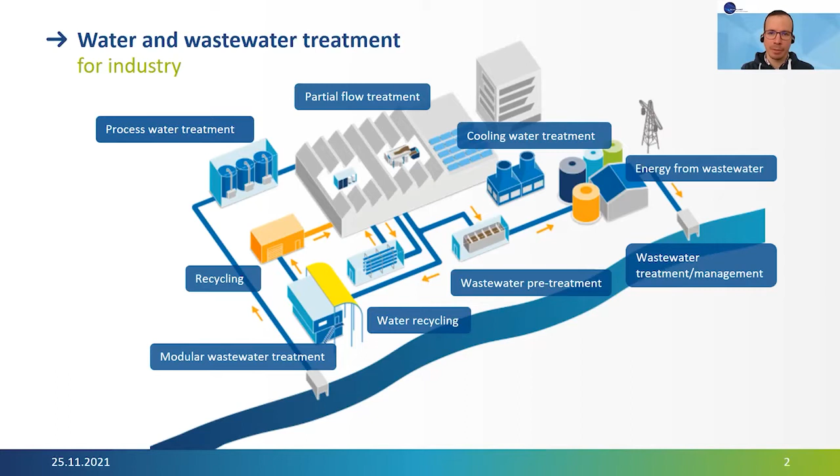Our services - we start with consulting, do the planning for our clients, design and installation. We do as well the plant operation and maintenance. We produce our own water chemicals. We have the full range of services required to operate the plants. We have now as well digital services for plant automation, plant control, industry 4.0, let's say, and we do a lot of plant optimization in ongoing process.

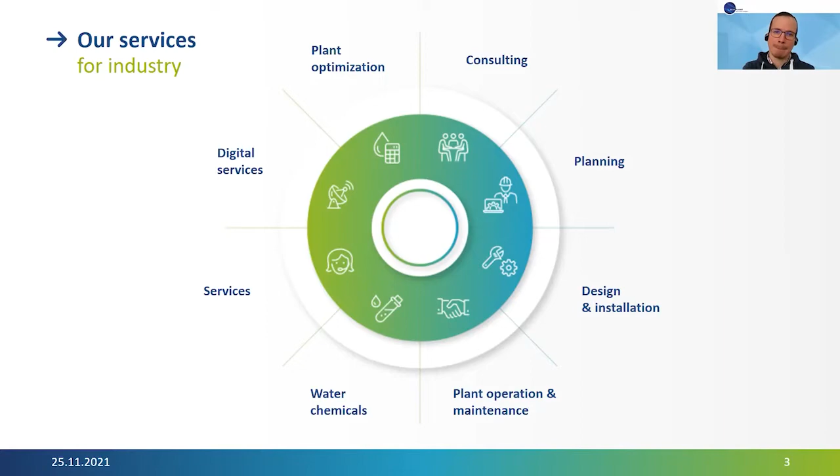The company has now more than 45 years of experience in the market. We now have a turnover of more than 200 million euros a year, 900 engineers in our company, more than 30,000 active service customers, and a localized structure close to our customers.

These are our locations within Germany. Our main places are Rossdorf, near Frankfurt Airport here, and near the city of Darmstadt. But we have a lot of subsidiaries here in Germany to do mainly services all over the country.

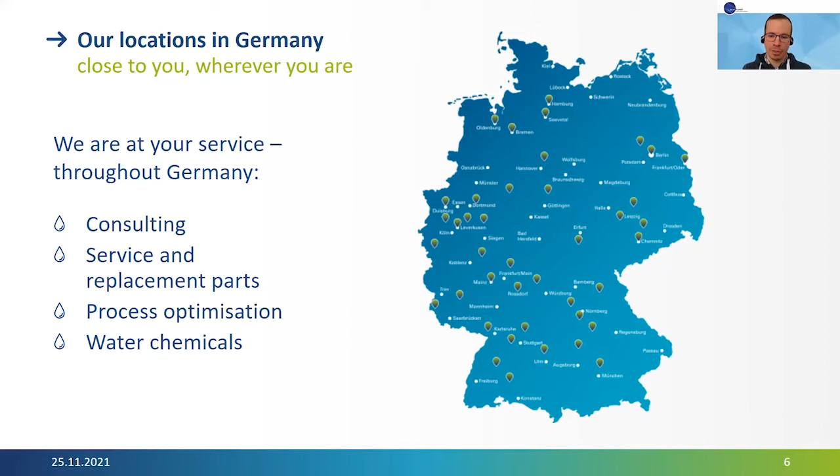Our industry experts examine process in a holistic way. So we do a lot of different projects. We have a lot of knowledge in different industries. We are not limited to these industries, but let's say these are the main industries for us - food and beverage, the chemical industry, steel, metal, surface technologies, life science, pharmaceutical. Mining is very strong, for example, in Russia. And others.

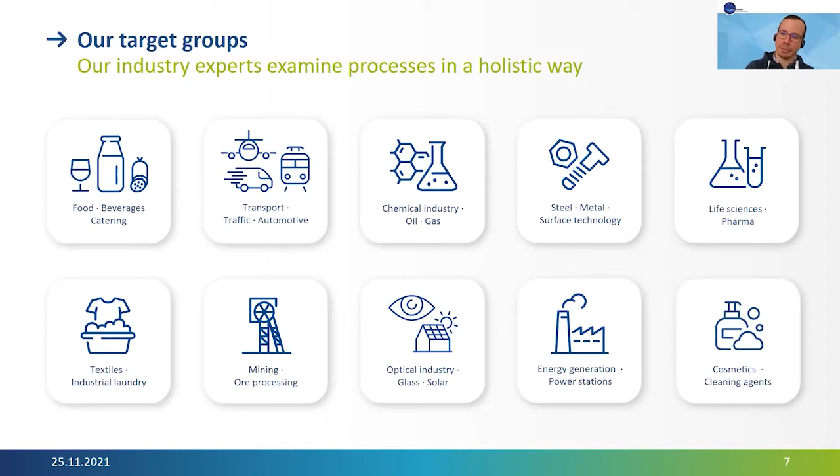The Enviro Water Group is getting bigger, it's growing, let's say, where Envirochemie is the head of the organization, mainly focused on industrial wastewater treatment and water recycling. We do everything that is individual plants and individual processes. And our subsidiaries and daughter companies are then more specialized. For example, the EnviroFalk company, which is specialized in more standardized plants in ultra pure water, for example, and water for pharmaceutical industry.

Innovatec, for example, is a company specialized in water chemistry, especially for cooling water systems. And Up2E is a company specialized in advanced oxidation processes for special applications, so really highly polluted wastewaters to purify.

As already told you, we do the consulting and planning. This is where we most likely start with. The individual problem from the client, we do then the consulting. We help him with lab and pilot test if it's necessary. If there has to be developed something new, we do start with lab and pilot tests, and we do studies and concepts. And then later on the planning and approval for planning.

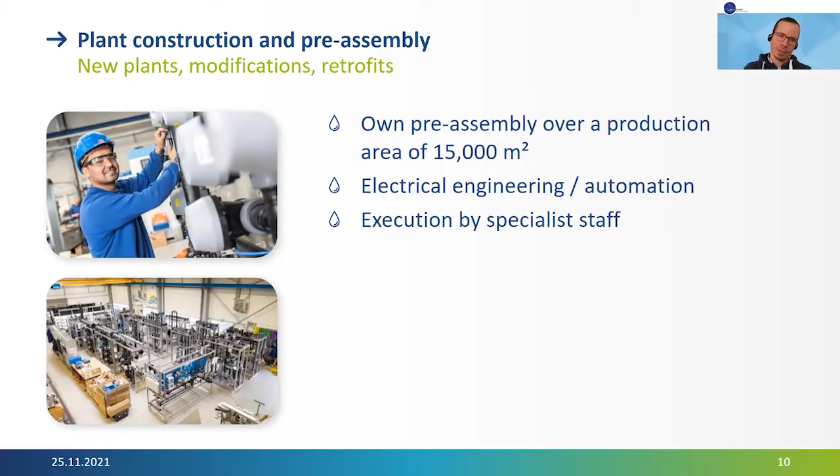Some words to the different technologies, just examples. The membrane processes, called in our house the Envopur processes, which is obviously microfiltration, ultrafiltration, nanofiltration, and reverse osmosis. And the biological and wastewater treatment, for example, aerobic and anaerobic treatments we do have there. All the different types of technologies you might already know - membrane bioreactors, nitrification, denitrification, anaerobic activated sludge processes, and so on.

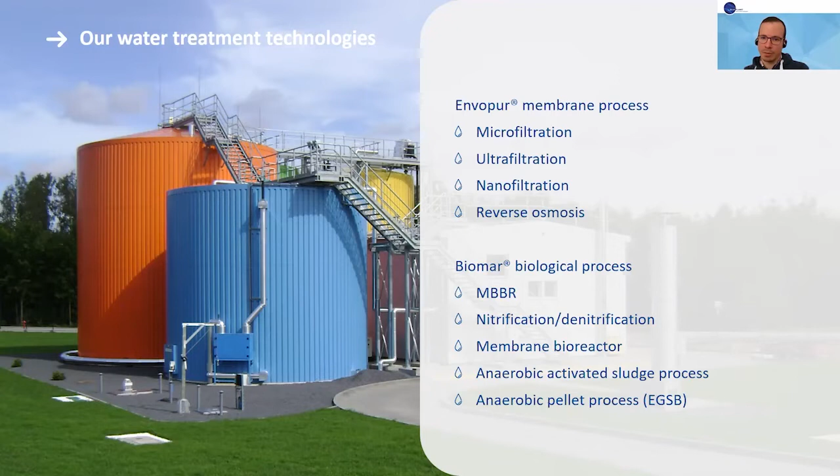We have the physicochemical processes as well, the very classical precipitation, flocculation, sedimentation, neutralization, filtration, of course ion exchange, and advanced oxidation processes. And we're very specialized as well in the dissolved air flotation systems, which are called FLOMAR.

Important for us is our pre-assembled processes. We do not pre-assemble all the equipment we supply, but here again you can see one of our biggest pre-assembled plants. This was a pre-assembled modular system with mainly flotation process and precipitation flocculation for a mining client in Russia. We pre-assemble the modules in Germany within our plant, then bring the parts to the client, do the final assembly, which is really just putting together the Lego parts, let's say, and then directly can start to operate the plants.

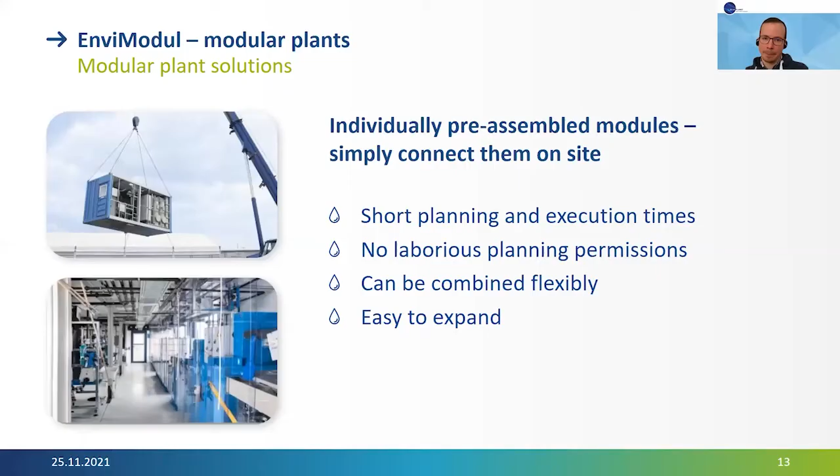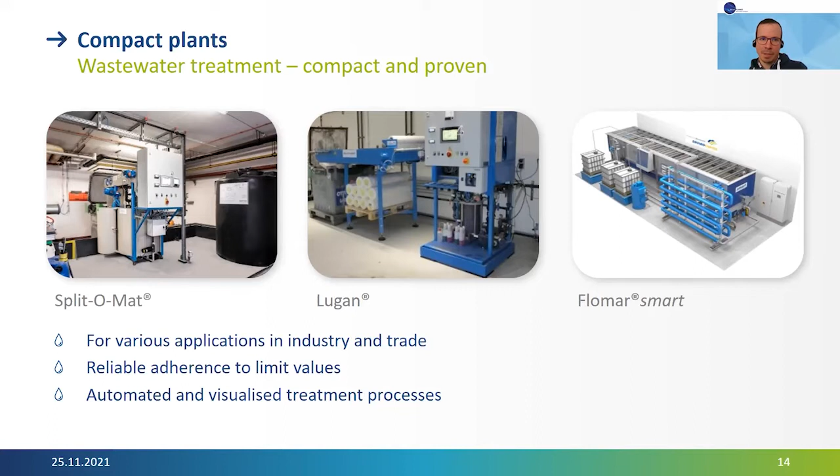We have not only big projects, big plants for high volumes to treat. We also have very compact small plants for applications with lower volumes to treat. This is where we originally came from 45 years ago, but it's still very important in the market, and there is still a lot of applications for small amounts of wastewater to treat. You can see here physicochemical processes, flotation processes, batch processes, but we're not limited to them. This is the main part of the compact plants.

We developed specialty wastewater treatment and water treatment chemical products for our clients' applications. This is very important because it's always a part in water treatment that plays an important role, and we have a lot of knowledge and our own production site, our own laboratory, where we develop the perfect chemical for the individual task.

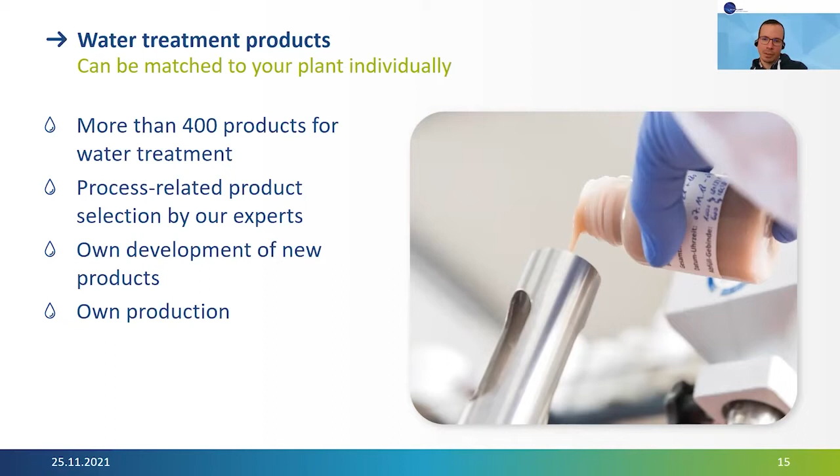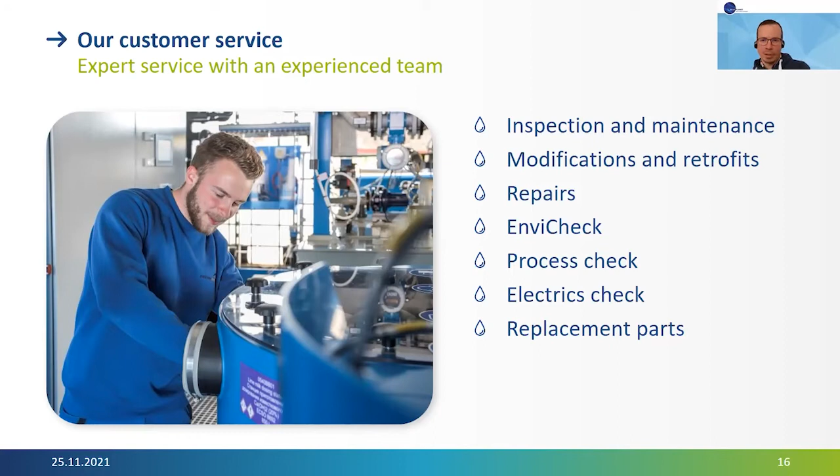Our customer service is key for us, to help the client always, to be with him, not only planning and doing the installation for the plant. We can help for the whole life cycle of the client's plants to keep operating the plant always.

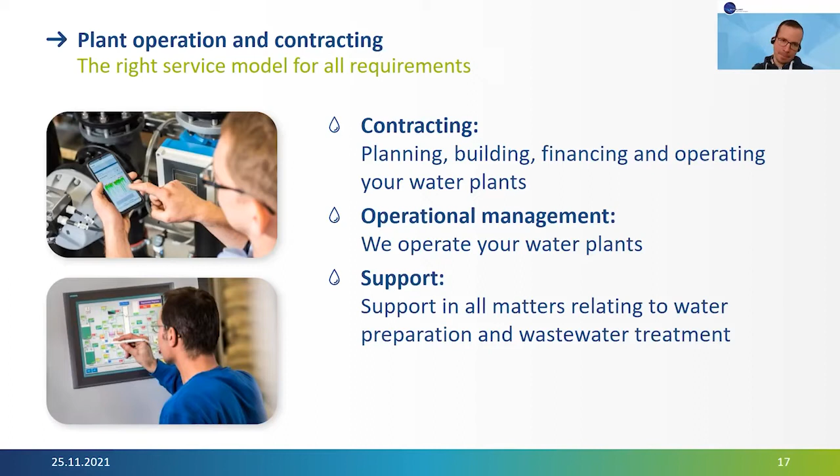Digital water management is getting more and more important as well. I'm not going too deep into detail, I mean most of you can maybe imagine what it is. You can connect from everywhere you are directly to your plant. You can see all the values, all the curves. You can really be connected always to your treatment system, be up to date, and can operate from wherever you want to. Therefore, you have very good process control always.

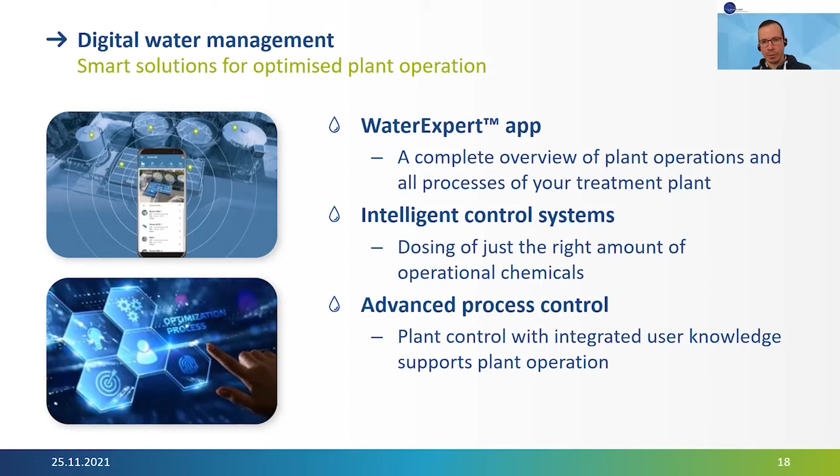And that's all for now with a very brief, short presentation. Thank you for your attention.

Thank you very much, Tibor. However, it was more or less a presentation of your company's activities, but what we are looking for is solutions. Can you please give us some examples about solutions which you have installed for industrial water reuse? And maybe some examples of established technologies and emerging technologies in the field of industrial water reuse.

Just give me a moment to come back into the window to share. I think I'm still sharing... sorry for that. Okay, nevertheless, I'm still sharing I think, I'm not sharing anymore my screen. Is this correct? I'm not sure if I'm still sharing my screen or not. Mr. Meyer, you can answer this question. I'm not able to do so. Yeah, you're still sharing your presentation. Okay, so maybe you have to close that presentation and then open the other one.

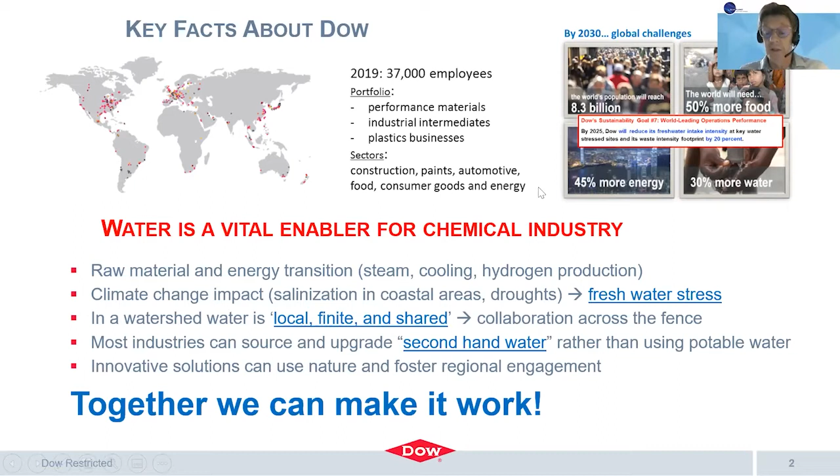Within Dow, we have defined what we call priority water stress sites - major locations across the globe where we are feeling severe water stress, whether at the gate in terms of water availability and quality, or at the back end where we have issues discharging effluents. For these sites, we have defined an objective to reduce our water intensity by 20% before 2025.

Each of these plants - and you see a couple located in Europe, like Boehlen in Germany near Leipzig, Terneuzen in the Netherlands, and Tarragona in Spain - has to come up with plans to mitigate their water footprint, achieving that goal of 20% reduction.

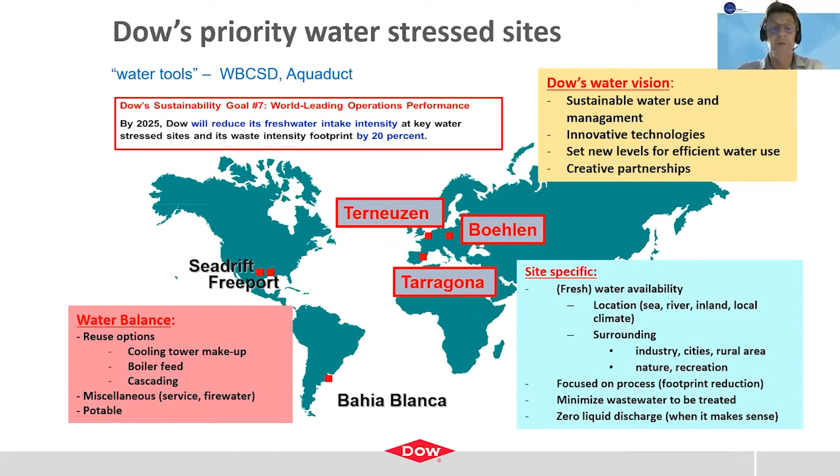Each of these plans will be very different because all the circumstances are different. Nevertheless, we try to make our approach as transparent as possible by using metrics for different areas in our water use, which also helps us set the right targets.

So we distinguish between freshwater source circularity - within the watershed, what alternatives exist for non-virgin, so-called secondhand water - and then, within processes, how we can optimize to reduce our intrinsic water footprint. Can we develop processes that demand less water for heating and cooling?

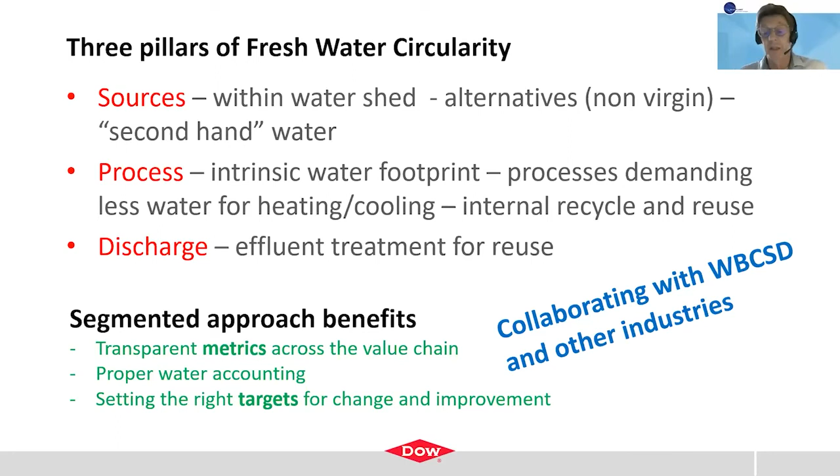On top of that, internal recycling and reuse where we can, and finally discharge circularity. As we improve water quality, it also becomes easier to start reusing effluents, and that's what we've been showing in the past decade already.

If we look at an example for Dow in Terneuzen, where I've been working for the past three decades - we are a major site here with about 3,000 employees, requiring more than 20 million cubic meters of fresh water annually, in a region with a total demand of maybe 30 million. So we are a major player there, which also makes us responsible.

The whole area has abundant brackish water but very limited amounts of fresh water - just a very minor amount - and we rely more or less on creative solutions, on top of a connection to the Biesbosch area, which is in the middle of the country. You can see that somewhere there.

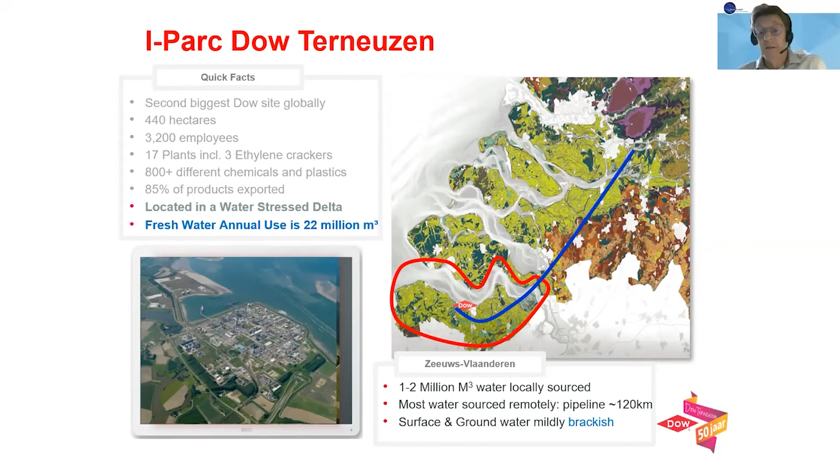Let me try to use my pointer here - that's not really working. In the middle of the country is the source of fresh water, supplying the whole region with potable water. That source is predominantly meant for potable water production for the whole southwest of the Netherlands, and we want to ultimately move away from that source to be sure we are not impacted by competition with potable water.

The second step of reuse we realized by collaborating with the water company Evides and the water board in the region, who are treating the effluent of the city of Terneuzen, and that portion also is being reused at the Dow premises after upgrading by Evides.

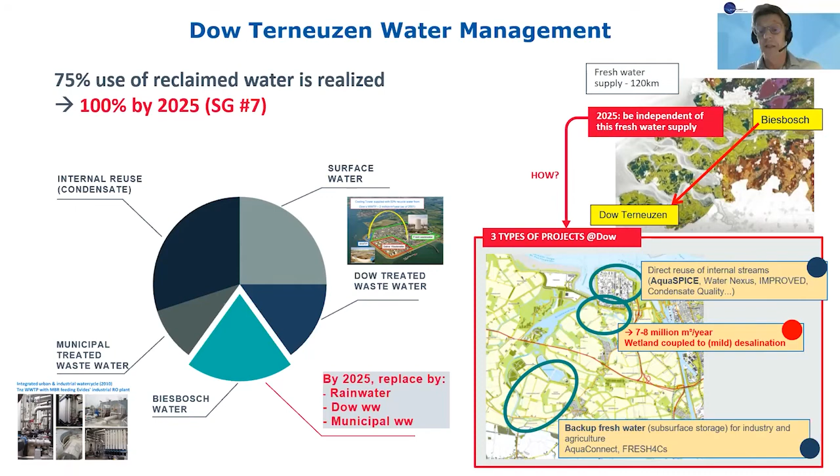Coming back to that red dot, what we are going to do in the next couple of years is reuse even more of the effluent of our own wastewater treatment plant and of the Terneuzen City wastewater treatment plant. We are roughly going to double these amounts, and on top of that also start reusing collected rainwater. That in total is about 8 million cubes of water, which we will then lead through a constructed wetland and then feed to a desalination unit to produce high quality water, which can then be reused at Dow.

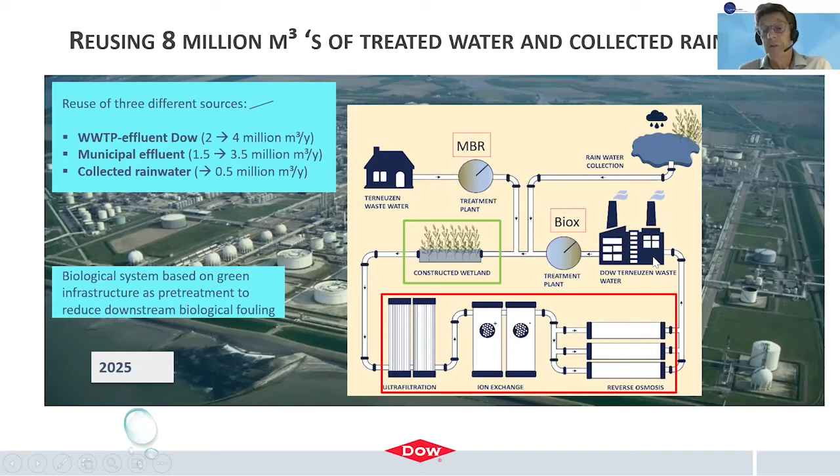The objective of the constructed wetland, and we did a pilot over the past 2 years where you can see a snapshot here, is to produce very stable water, which can be fed to a desalination train with membrane systems, which are less vulnerable to fouling by that stabilization up front.

And indeed, that's what we saw in these pilots over the past 2 years, that we really achieved a water quality which is very stable and which has very little biofilm formation tendency.

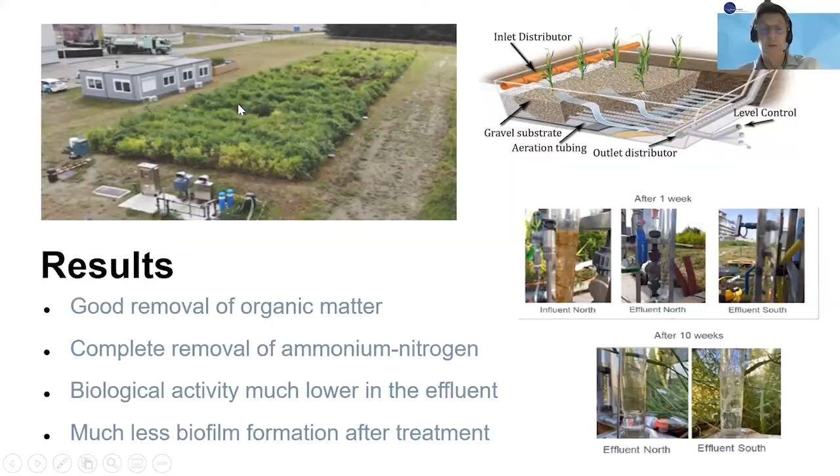So that's very promising, and the intent is to make an upscaling in the next 2 years to a system - this is an artistic impression - where we are going to treat about 1,000 cube per hour through wetlands and then through that desalination train, which then should be in operation by 2025.

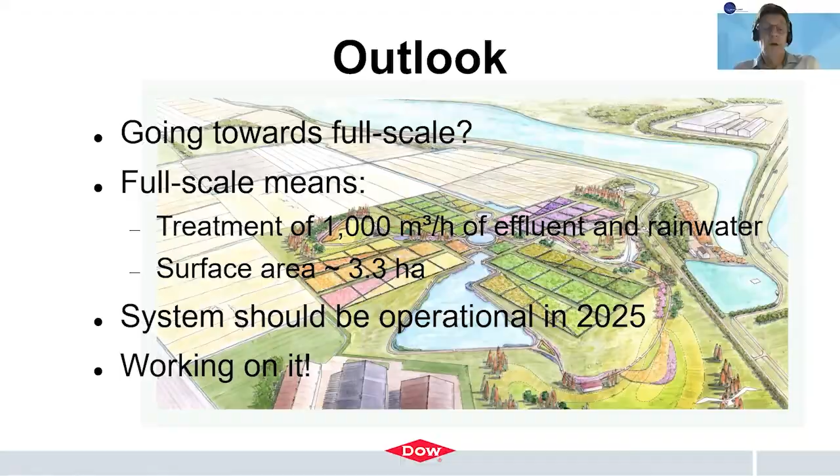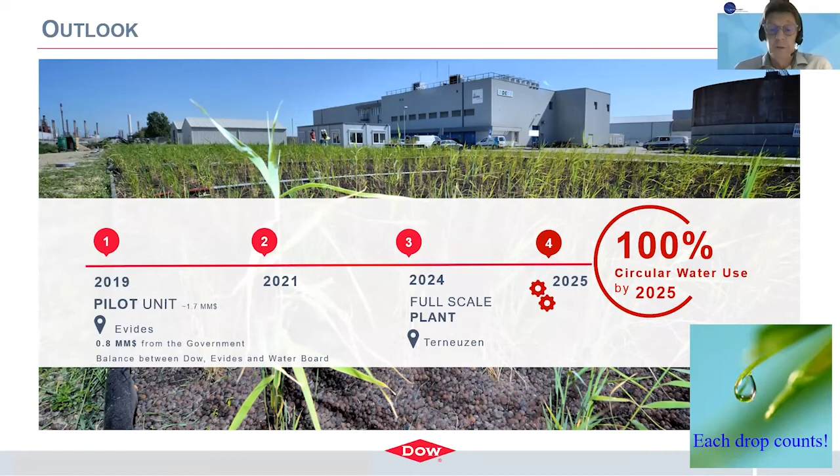So with that, we will achieve our objective of 100% second-hand water use for our facility in Terneuzen. And if you look at our overall objectives, we are making nice steps into our sustainability journey, because these type of projects can be copied to other industries and sectors in Dow, but also externally maybe.

We are really benefiting from over the fence collaboration with other parties, which is also beneficial by getting subsidies from European and national funds, and we try to make everything as transparent as possible to be sure that we do the right things on the long term. And that's what I'd like to share with you. Thank you. If there are questions, I'd love to answer them.

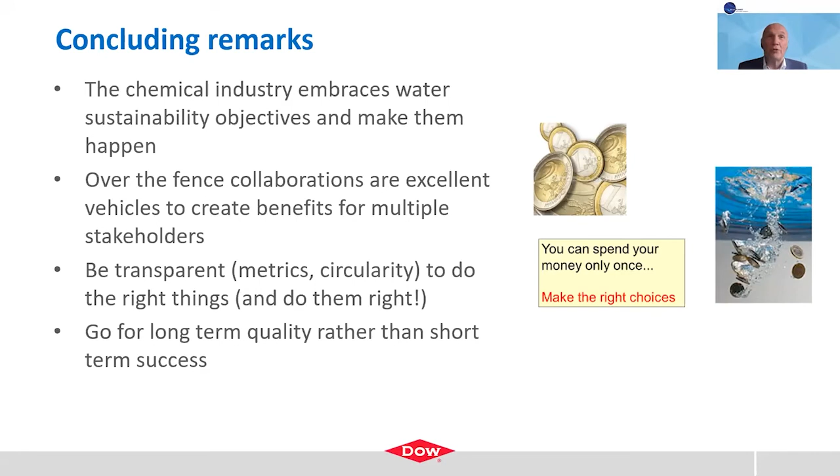Yes, thank you very much, Niels, for this very interesting presentation about your strategy with respect to water management. I would call it water management - it's not only water reuse, as you showed, but water management in general, and very strategic with implementation of research projects, but also with a long-term strategy within Dow.

So the floor is open for questions. If you have one question, please, you can unmute your phone or your microphone. It's possible, as we are not many people. Let's say we are in total 47 now.

That would be okay. Nevertheless, my first question is related to the concentrates. So water reuse generally is, let's say, already solved, I would say. We have a lot of technologies available in order to produce high quality water, even though post-treatment of permeates from reverse osmosis are applied, where we experience long-term experience in Orange County, for example, etc. But what's about the concentrates, Niels?

That's a very good question, of course, and each of the locations will have their own solutions. In the Terneuzen situation, we are pretty lucky being at the shore, close to seawater, which is available there to receive these kinds of concentrates without any issues. But in other areas, you need other types of solutions, which will generally be more energy intensive.